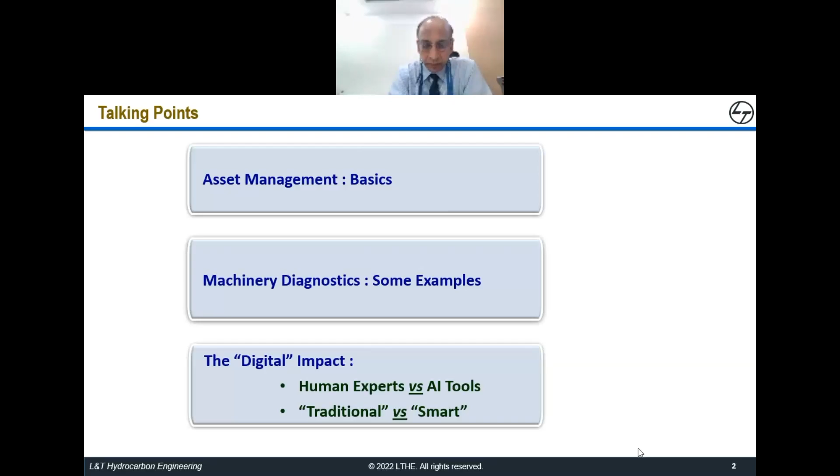Today's reality is, and I think all of us are exposed to this, myself included, we are constantly bombarded by a lot of jargon. We understand some of it, we do not understand most of it. But one thing we know for sure is that they're really impacting our lives, both professionally and socially, and they're going to impact and transform our lives in future.

One offshoot of this is, of course, the industrial sector, where we have seen the advent of IIoT and how it is transforming the way businesses are run. Machinery is designed, manufactured, engineered, and operated in the industry, and how this could help us meet many of the challenges we may face.

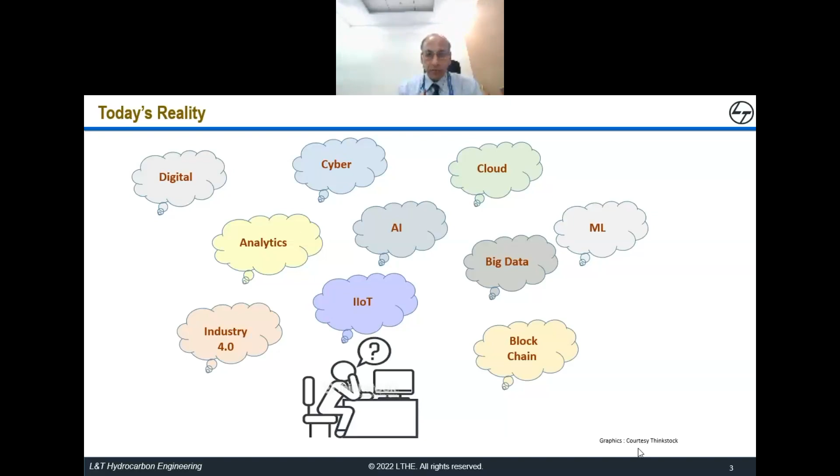Coming to the basics of asset management, let us try to understand why this is important for us. What do we do under asset management? Who are the people or the stakeholders here? And why is it so important for us?

Basically, the industry needs asset management primarily because of regulatory requirements - you have to comply with certain regulations and laws as you do business. You also have to uphold safety performance requirements, improve the performance of your aged plants as machinery becomes old, and avoid or defer your capex decisions - avoid putting a lot of money when the industry condition is uncertain and you lack clarity about the future. You can only take that decision once you know precisely what the health of your current set of assets is.

Also at the enterprise level, a very large conglomerate - suppose a company the size of L&T having multiple diverse businesses - has to take a balancing decision with respect to capex deployment and performance enhancement. What kind of information should they have - precise information about the health of the assets, how long they can operate, and with what efficiency they can operate. These are some considerations under asset management.

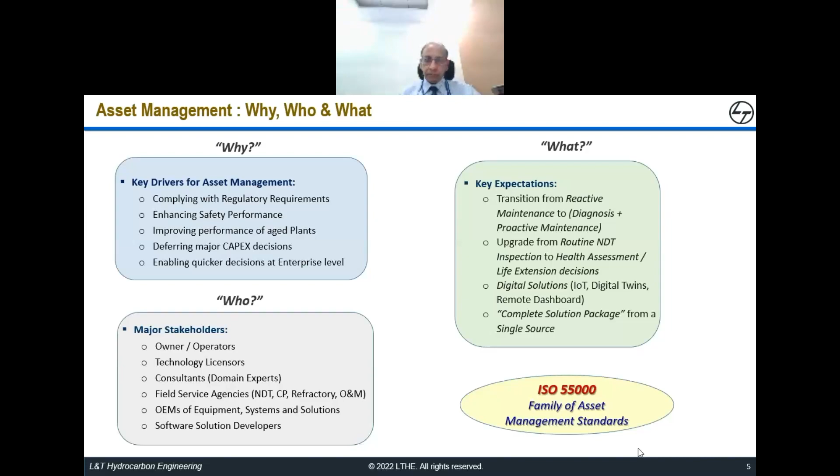What could be the asset management solutions when you are managing an industry that has, for example, a few hundred rotating machinery, a few thousand static equipment, kilometers of pipeline or piping, and a lot of other things built into it? What kind of solutions do you need to run this without any damage or catastrophic failures or accidents, and at the same time deliver the profitability that you are looking for?

You need to understand the integrity of these assets - are they in a fit position to run and deliver what they are supposed to deliver? Then the performance improvement piece - are they delivering at the optimum level, or is there still something left that you can extract? There are programs in the industry where you shut down the plant for a few days, weeks, or months and then refurbish the machinery, overhaul them, and put them back in as new conditions, so to say, so that the performance can be improved.

And you have a lot of programs like modification, upgrade, debottlenecking, where you again try to basically enhance the performance of these assets. And of course, you have the routine operation management and the maintenance management just to keep the machines running and to derive the output that they're supposed to give.

So as you can see, it is not one solution or two solutions. It is a complete set of solutions that you need to have at your disposal to run and basically operate your industry in the best possible way.

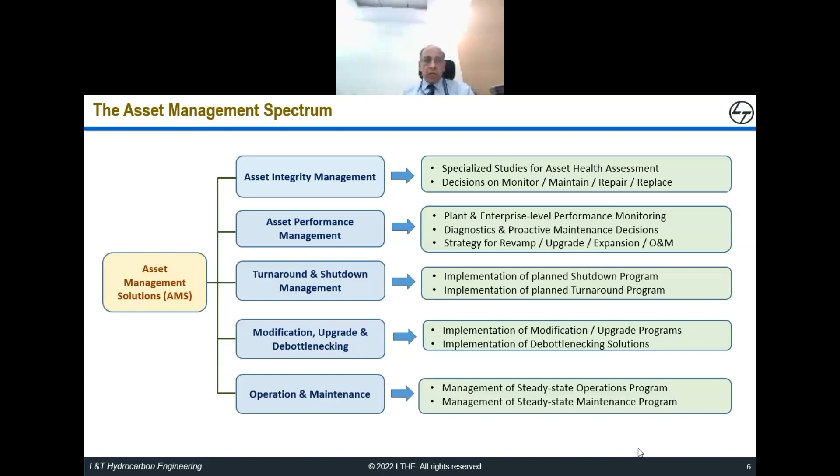So this is a traditional definition drawing from the concept presented by ISO 55000. There are three elements - basically the assets, the integrity of the assets, and how do you manage them. Assets are, of course, all the physical assets. Of course, in financial terms also, people call it asset - for example, you have asset management companies in insurance, banking, and other things.

But here we are talking about physical assets in the operating industry that include the plant and machinery, the offshore assets for oil and gas industry, the onshore pipeline and the pipings, the civil infrastructure - all the buildings, bridges, flyovers, highways that you see, most of which we also build through L&T. Transportation assets, the power sector assets, telecommunication assets - there is no end to this list. Everything that you see around, which operates and provides us the environment that we live in and the businesses that we are engaged in, these are all assets.

Now, coming to the integrity aspects - integrity means that the asset should perform safely and deliver the intended output or function in the prescribed conditions or environment over a specific period of time. This is very important to understand because the asset life cycle is not infinite. Any plant or machinery that you install in the industry today will have a definite life over which it can operate and deliver the output for which it is designed.

So there are three parameters basically. One is the safety compliance - that is very important. Then the intended function - it's not that you can do everything with a given asset; it will only deliver as per the way it has been designed and engineered. And the environment - suppose you are supposed to run something in sub-zero temperature, and you install the same machine in a desert condition, will it perform in the same way? And of course, as I mentioned, the definite life cycle, the specific period of time.

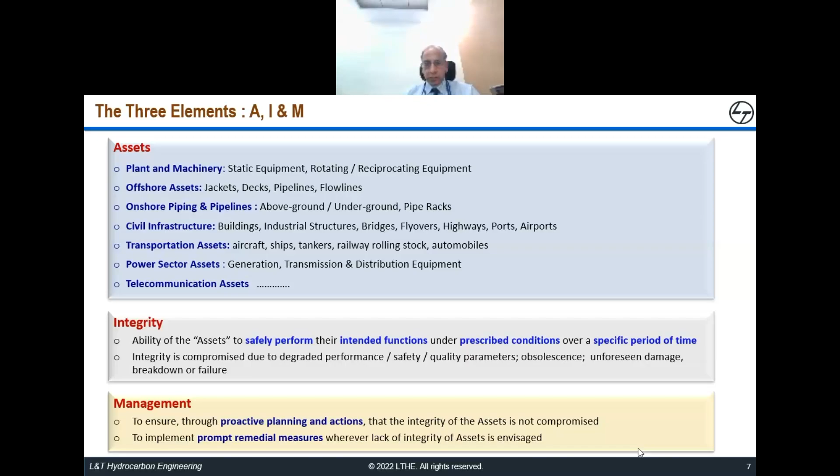So what are the tools and techniques we have at our disposal to achieve these kind of goals?

One is at the design and engineering phase of the plant, when you are conceptualizing how the plant should look, what kind of machines it should have, and what specifications those machines should have. Today we do simulation to a large extent in designing plants and machinery, from the process side, the mechanical side, and the thermal fluid side. You have a lot of design techniques and software tools available.

You have design verification. Earlier, and even today in some industries, people used pilot plants for trial runs of new designs, but mostly this is done through simulation now: scale up studies, prototype testing, pilot plant trials, experimental stress analysis, before you perfect the design of the machines.

Then, of course, you do the reliability assessment. Will it have 95% reliability? Will it have 99.9% reliability? You design that in the engineering phase so that you get the optimum output when it is put into practice.

One major degradation mechanism we face in industry, at least in my industry which is hydrocarbon, is the corrosion risk. We do a lot of simulations to understand that risk, the corrosion rates, and what kind of protection you should build into the design to avoid corrosion.

Now we have put the machines in the plant and it has entered the operating phase. What tools or techniques do we have to ensure integrity of assets? One is periodic monitoring: vibration measurement, noise measurement, debris analysis in the fluids particularly the lube oils, thermography which is thermal imaging of hot surfaces, and monitoring of process parameters.

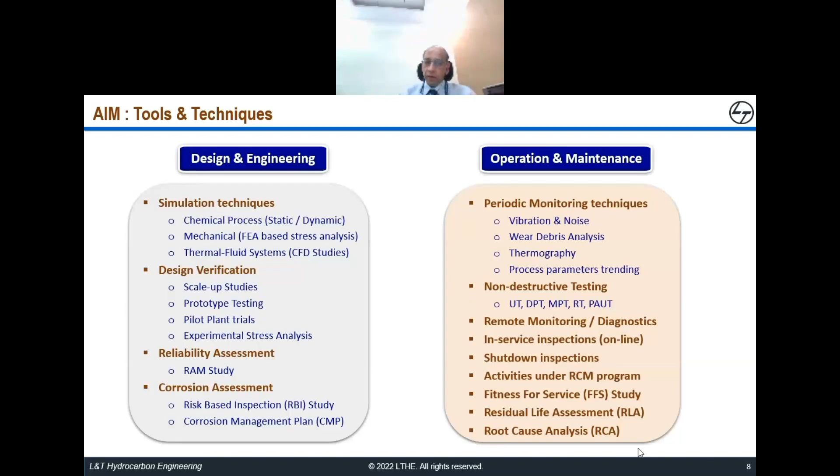We do some specialized techniques too. I won't have the opportunity to explain any of these today, but just to let you know: fitness for service or FFS, residual life of equipment which is RLA, and root cause analysis technique which is RCA. These are some of the techniques we frequently use in industry to understand the health of machinery and how we can extend its useful life.

Now, there is a concept of asset life cycle. Traditionally, when people talk about asset management, they only talk about the operating phase of the plant. For example, a plant installed today will probably run for 20 or 25 years, and you focus only on that operating and maintaining phase. But the reality is that if you really want to do asset management in a holistic manner, you have to start from the design and conceptualization of the plant itself.

So the key to successful asset management is this cradle to grave approach, where you start from the conceptualization of a plant and it ends with the decommissioning of the plant. Through the entire life cycle, you adopt the tools and techniques just discussed to do the asset management in the best possible way.

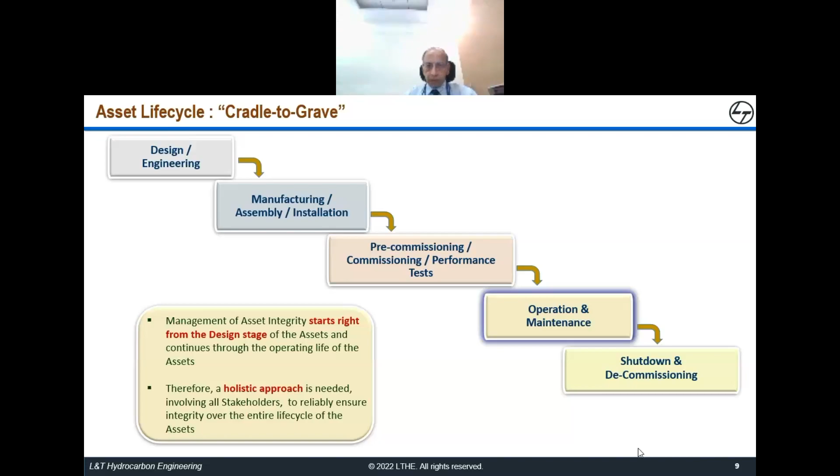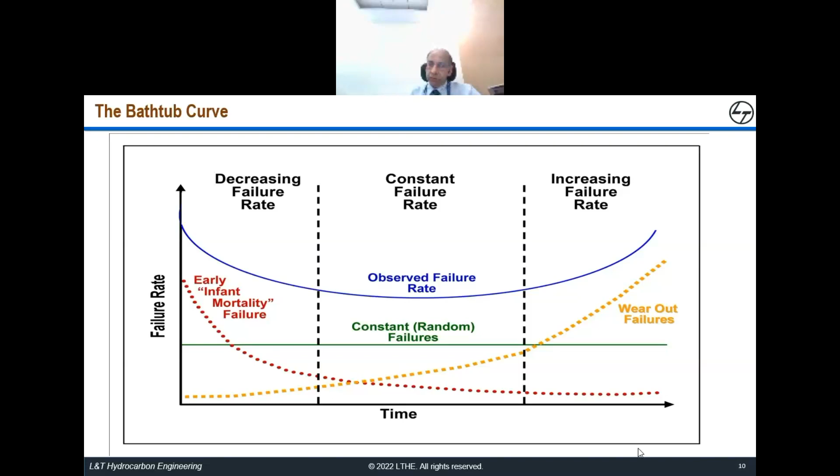We still do that for systems which are non-critical and where you have redundancies built in, with other alternatives that can start operating in place of the failed equipment.

Then comes time scheduled maintenance, which is the most prevalent even today, though it is not the most efficient way of doing maintenance. But we still do it for very critical assets in the process industries, turbo machinery, power plant equipment, oil and gas production equipment, where you can't afford to have failures.

So every say 2 years or 3 years, you stop your plant, do a complete overhauling, and rectify the faults that are developing, then put the plant back in operation. But this is not really cost effective, as you do a lot of unnecessary maintenance where it would not be called for.

That is why people gradually switched to condition based maintenance, where you do the maintenance that is actually called for by the prevalent condition of the asset. You try to do some health assessment on the asset, in terms of vibration, stress analysis, then microstructural analysis for the material, and try to see what condition it is in, and what kind of maintenance it may require today or a couple of years down the line.

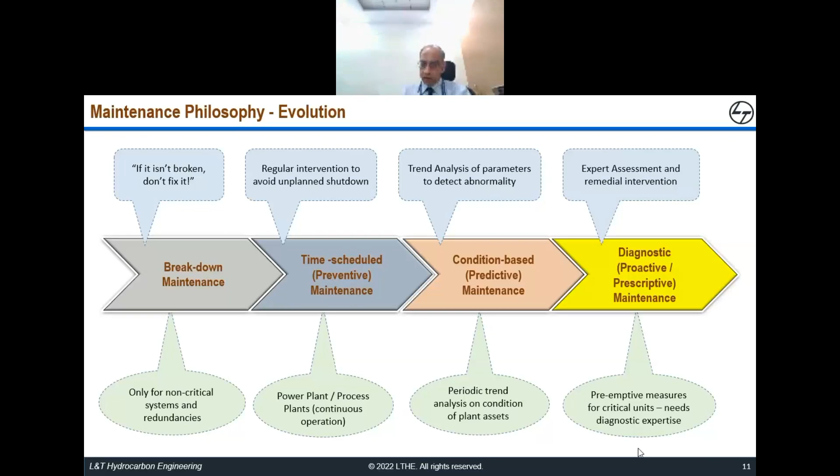With this knowledge of basic asset management philosophy and approaches, let us now see how we do this in real life industry. I'll illustrate using common machine components that we are aware of, for example gears and bearings and stuff like that. Though these are part of the whole plant, they are not the plant by themselves, but their failure is very critical for the running of the actual pump, turbine, or compressor.

Now, I'll start with gears. Gears are very popular machine components. Right from our engineering days, we have learned how to design gears, how to manufacture them, what kind of problems you see in gears, and how to troubleshoot gears.

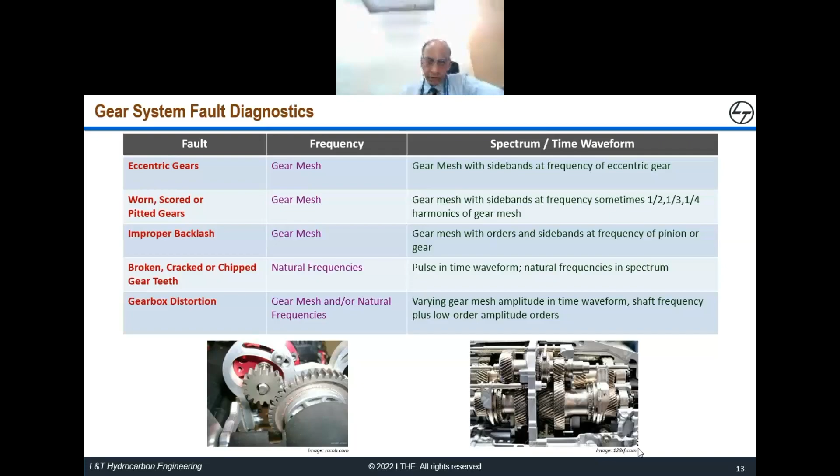Now, there is some mathematical basis for this. As you know, in gear and pinion, we have a very periodic kind of engagement through the machine. In terms of the gear tooth, pinion tooth, and running speed, you can have various combinations of probable frequencies that you may see in the spectrum.

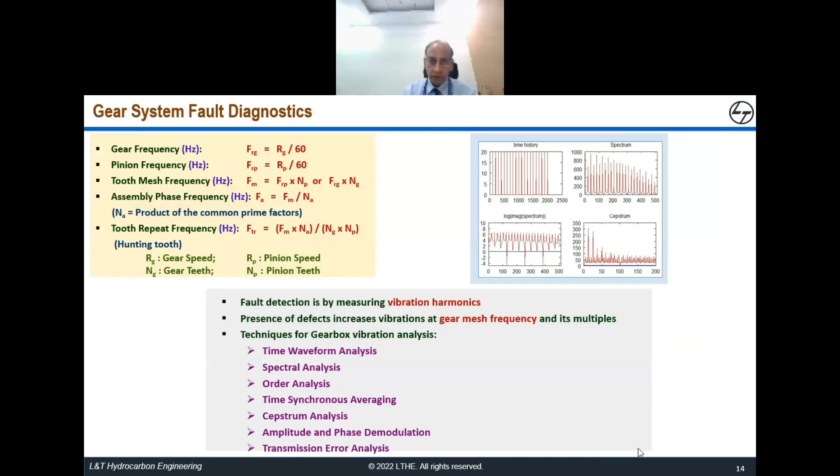The frequency spectrum analysis techniques - some of these I have listed here - are what we typically use in the vibration analyzer when analyzing gearboxes. They throw up the fault signals, and through that you diagnose the fault, and once you know the fault, you also recommend the corrective measure for the gearbox.

These are some of the actual plots, as you see - some of the faults are mentioned here. I will not go line by line, just to tell you that the dominant frequency in a gearbox spectrum will be the gear mesh frequencies, and depending on the severity of the problem, you will see multiple sidebands, very large amplitude lines vertically, and sometimes even natural frequencies of the gears and pinions if they have cracks. These are some of the things the expert should be able to extract from this - it should not be too difficult for him.

Now, when we go to the second part of my talk and discuss digital solutions, I'll try to explain how this kind of diagnosis, done by the human expert based on experience, would be done by an AI tool, for example. Is it possible at all? Can the AI tool do a better job, or can it not do this kind of diagnosis at all? That would be interesting to discuss.

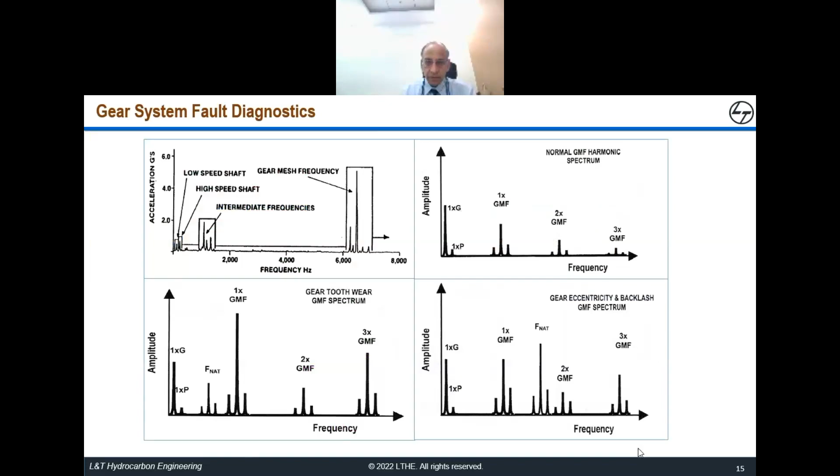Okay, some similar kind of spectrum - here you see some of the other classes of faults. You see a lot of subharmonic lines on the left hand side, which shows a lot of incipient damage, not very prominent yet in the machine, but which may cause trouble in the future. These are some of the things I can read out of this, but probably if you really get down into the mathematics and extract the frequency and try to correlate, you will also arrive at the same kind of diagnosis.

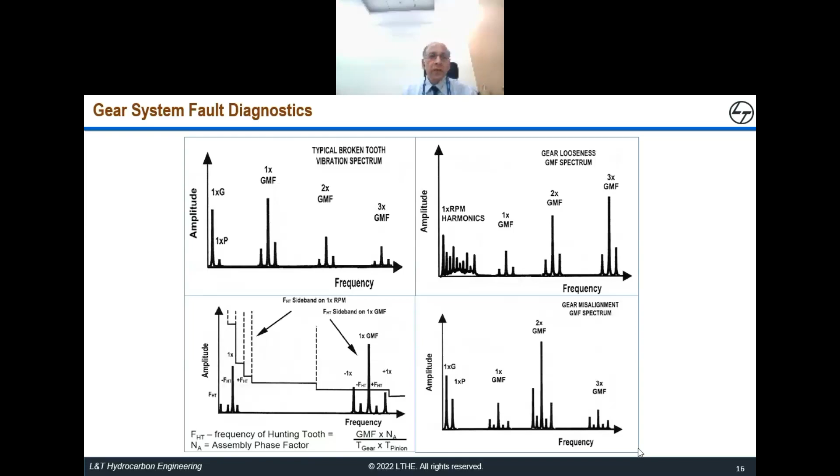Coming to the rolling element bearings - by the way, dynamics-wise they are very similar to gear mesh. Here also you have a set of contacts which are periodically engaging and disengaging, and you have multiple components in rolling element bearings. As you know, you have the rolling elements, the inner race, the outer race, the cage, and all sorts of combinations of faults can occur. Rolling element bearings are very sensitive devices - if you mishandle them, half their operating life will go. And of course, on top of that, you have a lot of materials-related damage that are possible.

For example, spalling, wear, fretting, corrosion, improper installation, improper mounting, inadequate lubrication, risk of electrical discharge, particularly in rolling element bearings installed on motors and generators. You can have load overruns, overspeeding, excessive point load applied on a bearing. There are many things which are possible, and we do have some understanding today.

If you see the body of literature that deals with the fault diagnosis of rolling element bearings, we are comfortably placed in terms of having the right kind of tools at our disposal, so we should be in a position to, with some sort of certainty, predict what is going wrong in a bearing installation.

And then again, just like in the case of gear analysis, we have frequency analysis tools at our disposal, where you analyze the raw signal coming from the bearing installation, extract the frequencies, and then try to diagnose the faults that would be present there.

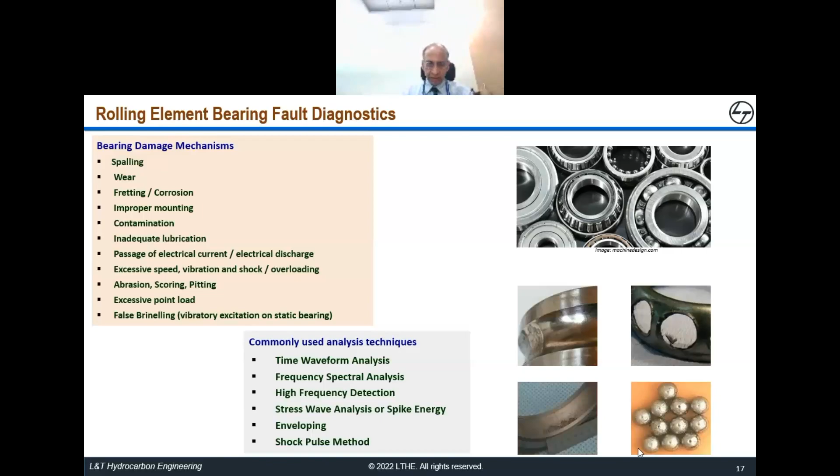And again, like gears, you have a set of characteristic frequencies depending on the bearing design and its operating speed. Whether the fault is occurring on the inner race, the outer race, the ball or roller, or in the cage, you get a very typical characteristic frequency in the spectrum. If you know the bearing design data, you know which frequencies to expect, and if those frequencies are present in the spectrum, you know what the problem is.

You see some of the time domain signatures on the right as the bearing runs, showing how the defect area gets excited within the bearing. You get these spikes in the time domain signal, which you can convert into a frequency spectrum, where you will see single lines at those locations of the frequency.

And once you match these with the frequencies shown by the ball pass frequency, or the inner race or outer race frequencies, you know that is the damage. The crack is there in the inner race, the damage is there in the roller, or the deformation is there in the outer race, and things like that.

So once you know beforehand how severe the problem is, you may recommend the operator to run it for some more time until the next plant shutdown, or if it is too serious or severe, you recommend replacement of the bearing at the same instant.

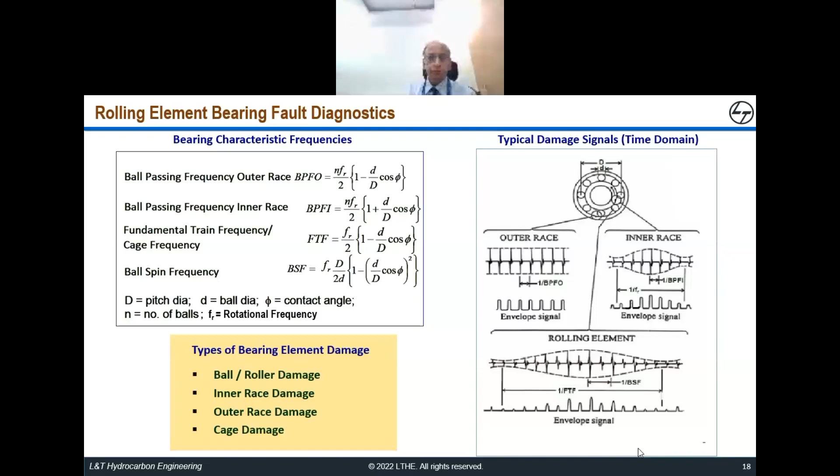These are just some examples of how you read the spectrum, how we as experts would be reading the spectrum to diagnose where the damage is.

So that is the kind of facility we have today.

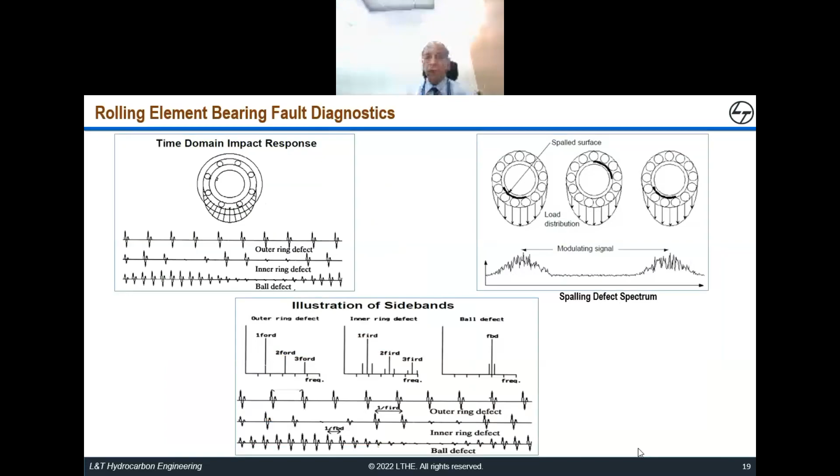Coming to journal bearings or fluid film bearings, there also we have a set of approaches to diagnose what is going on. Now it is comparatively difficult to handle compared to gears and rolling element bearings. In journal bearings, as you know, it is very difficult to open the bearing, and you cannot really replace it. You do a lot of online monitoring through the proximity probe system to pick up the displacement signal from these bearings and try to analyze as much as you can through a set of plots or curves which are characteristic of different failures. I'll explain some of these.

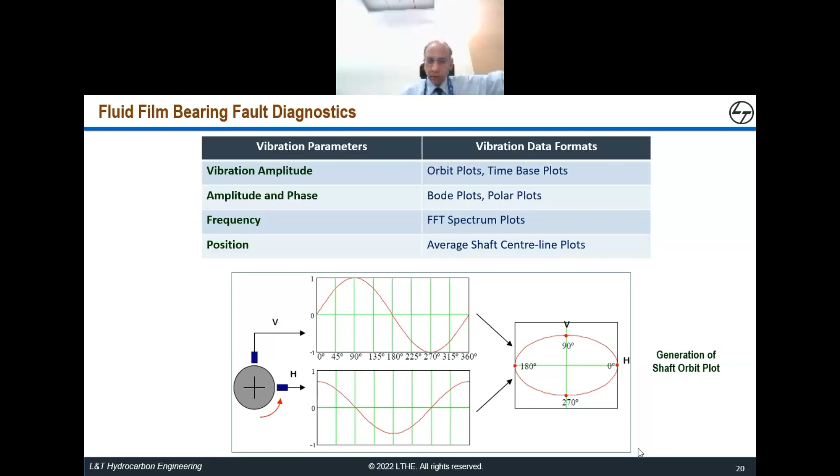Depending on the shape and size of the orbit, you can actually extract a wealth of information about the bearing damage. Similar to gears and bearings, you have a very nice correlation between the vibration pattern and the different faults in the journal bearing. If you can spot these frequencies and monitor this pattern over time, you can predict how the deterioration is happening in the bearing.

There are various kinds of damages or problems possible in a journal bearing. Some of these are listed here, along with their characteristic frequencies. One thing that is very dangerous in a journal bearing is the subsynchronous vibration signature, which shows instability in the bearing that normally builds up and wrecks your machine. So you should not normally expect a half frequency or subsynchronous frequency spectrum in the vibration signature from a journal bearing.

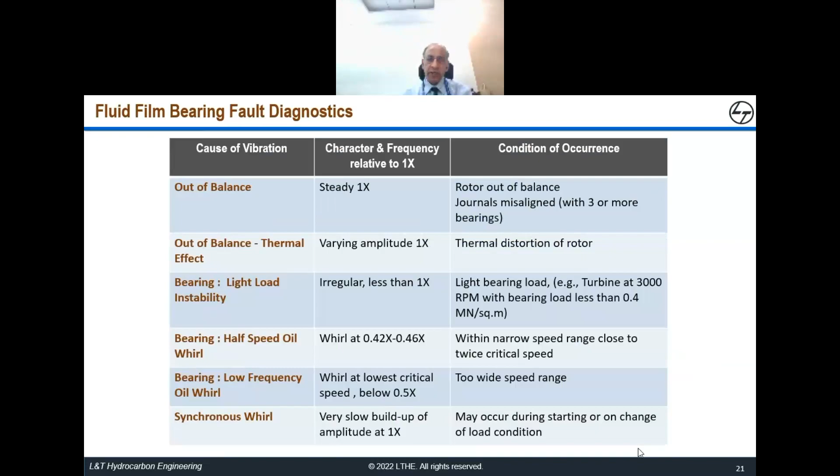Basically, the orbit plot study tells you all this information, and based on that you can take corrective measures, or instruct the machine operator to run the machine in a particular way so that you don't run into further problems.

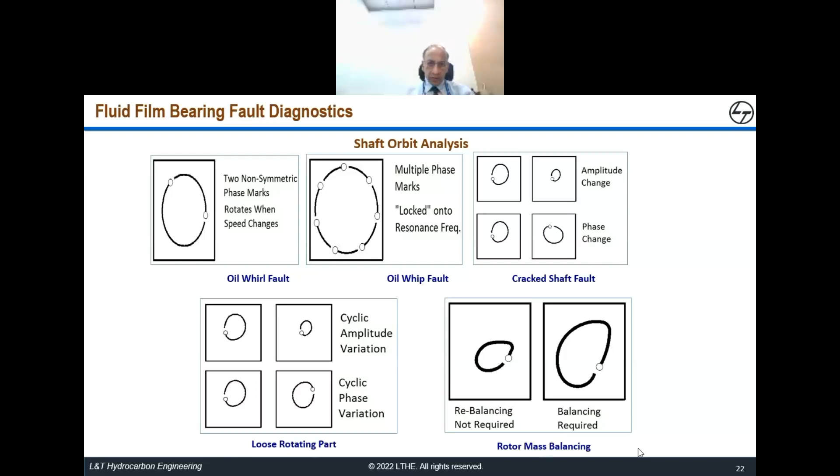I'll also briefly outline another technique that is very popular in the industry today, that is thermography, where you take a thermal image of the equipment or component you are studying, map the temperature distribution over the surface or component, and try to diagnose where the hot spots are.

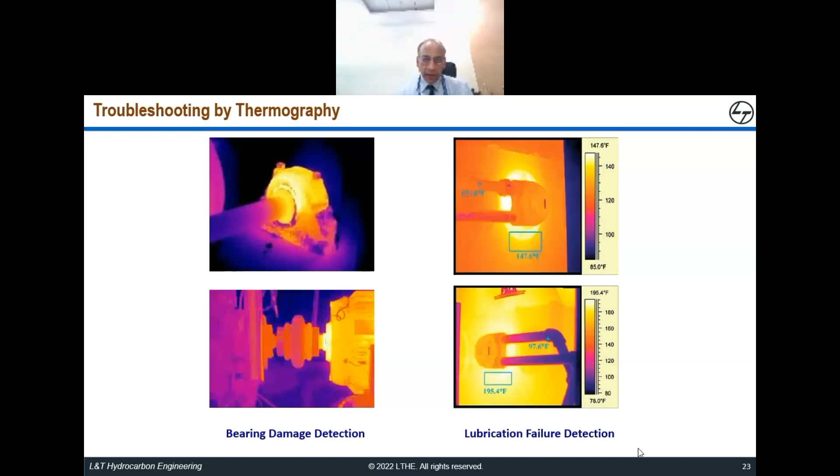And there is no further difference I could find, but we successfully diagnosed the problem as the wire wool failure. We did the material testing of the failed bearing and came up with the diagnosis which Neal had suggested in his handbook. That is how the problem was solved, and it was found to be a materials problem, high chromium content in the bearing liner.

And the OEM was obliged to supply the replacement bearing free of cost. Now, this is the kind of once in a lifetime problem where it is very difficult to know what happened. Luckily, in this case, we could establish the cause and get the compensation from the supplier.

But we may not be so lucky every time, and some of these actually go undiagnosed, and we never knew what actually had failed and how it failed. That is a nightmare for a diagnostician, but it can happen in the industry sometimes. It would be interesting to know how a digital tool or an AI tool would handle this kind of situation.

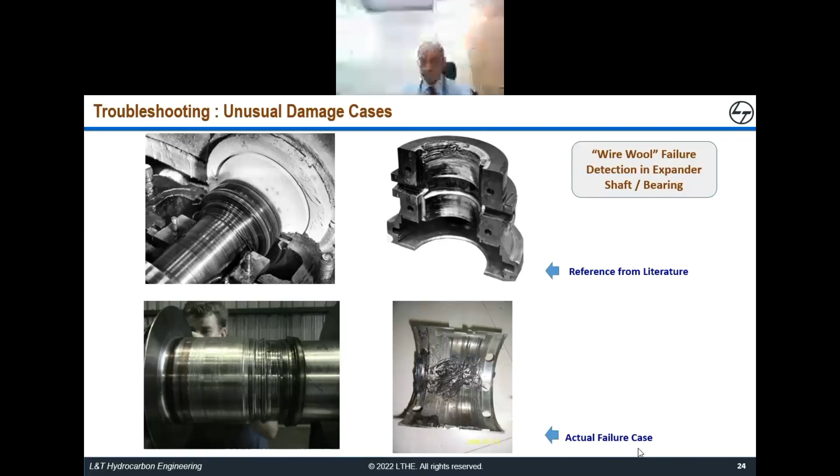So now I come to the last part of my talk, where we will try to see the human expertise at play vis-a-vis what the digital counterpart would do in the kind of situations I just explained, with respect to asset management and asset fault diagnosis in real life. So basically two points I will touch upon.

One is how the human expert is placed with respect to the capability of AI tools, and can we have a combination, or are they really mutually exclusive? Can we still marry traditional with the smart or emerging approach to asset management, or are they totally different situations? It's like water and oil, you can't mix. So let us see how it goes.

What does a human expert possess? The human expert is supposed to have rich domain knowledge, typically 30, 40 years of experience in a given line of business or practice. He will be having a lot of experiential learning, which he has learned on the job, which may not be taught in a classroom. And human experts are, of course, scarce.

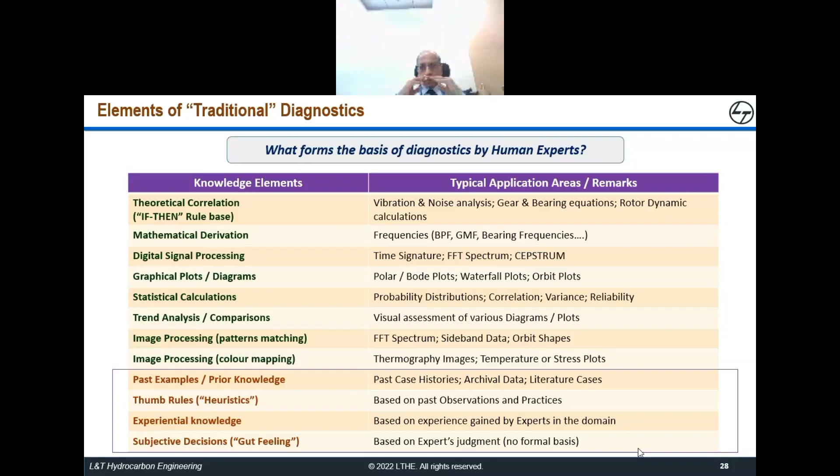Now come to the way the AI tool would be functioning in a similar kind of situation. What would be the knowledge elements feeding the computer tool or the AI tool or the digital solution that you are employing, and how it will be processed by the tool. In the first part, the theoretical correlations, the mathematical derivations, signal processing output, graphical plots, all these can be codified and fed to the tool. These are structured data and information you can easily correlate, and the computer program can be trained to process it in a certain way and give you the output.

But again, as in the last case, if you look at the 3-4 items at the end which I have highlighted here: past example, prior knowledge, rules of thumb, heuristics, gut feeling - how would you teach the AI tool about all this? This is so very typical of human. You cannot really codify it in a structured manner, develop a computer program, train that program 100 times, 200 times on a case, and then deploy it in the industry to solve the problems. This is where the disconnect comes. This is where probably the AI tool may not really be in a position to replace a human expert.

This is what we feel today, because we see in the industry the advent of digital solutions in a big way. We are into the IIoT regime for almost a decade now, and a lot of it has come into the industry and is being used routinely. And of course, we humans are still there manning the industry, running the industry, and doing troubleshooting, and we know how we solve problems. This is one area where probably today's technology is not supporting us in a way the human expert can support the problem.

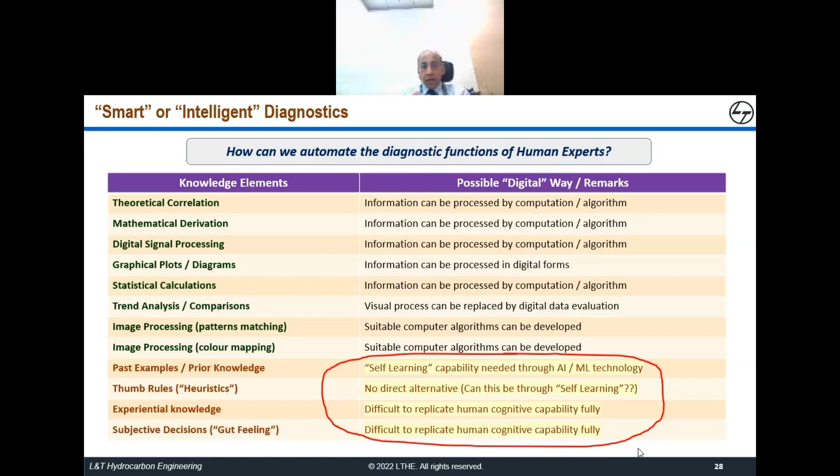If you consider this as a digital platform, you will have a lot of sensors mounted on the machine which are collecting the data day in, day out, maybe in real time. You feed the data, you pre-process and analyze it through some digital platform. It could be your cloud resources for storage of data, it could be a data historian, it could be a digital twin, a digital model of the plant that is running. You could have some specialized solutions based on artificial intelligence and machine learning, and you could have a lot of analytics built into it depending on the volume of data that you generate from the plants.

So when all this is done, the domain specialist would look at that and give some recommendations based on the processing that has been done in the previous step. And what could be the output? It could be expert advice, it could be remote diagnosis output, it could be some remedial action suggested to the plant operator, it could be certain kind of recommendations given in the form of an apex dashboard to the top management in the industry for them to take the decision for the future - whether to retire that piece of equipment, whether to replace it, whether to go for new capex, or set up a new plant altogether and decommission the existing old plant.

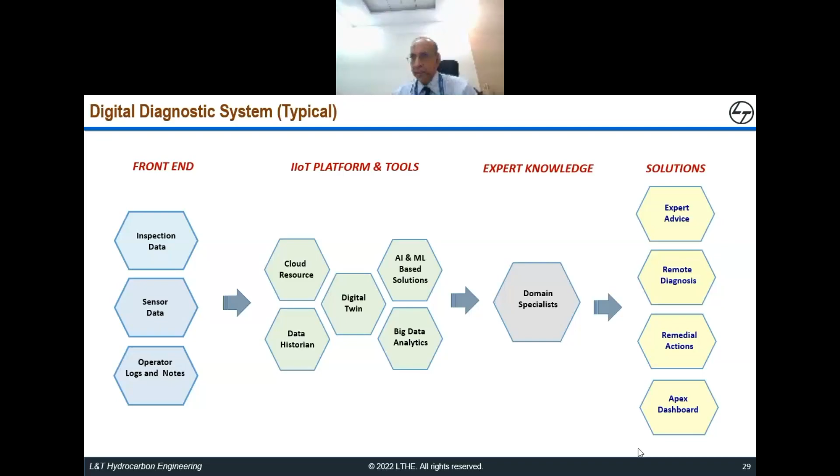You have instrumented all your pumps, compressors, and turbines with these sensors, and connected all of them to a data collection unit. It also takes input from various kinds of studies you may be doing offline, such as reliability studies, RBI studies, HAZOP studies, failure analysis studies, and these are all fed into the database you are developing along with the sensor readings.

Then you have a data historian, which maintains the archive of historical data generated from the plant over weeks, months, and years. Once you do the analytics over this entire database, you come to the output.

It could be a form of digital log, KPI-based monitoring, alerts and notifications, reports or MIS documents, or role-based dashboards for different layers of management — the control room operator, the plant manager, or maybe the chairman or president of the company. They would like to look at different kinds of output from the plant to take their decisions in day-to-day life.

You could get predictive and prescriptive solutions coming out of the data analytics. You could get plant performance analytics — how the plant is doing today compared to last year, how it is expected to do next year, and things like that. So this is all happening at the plant level.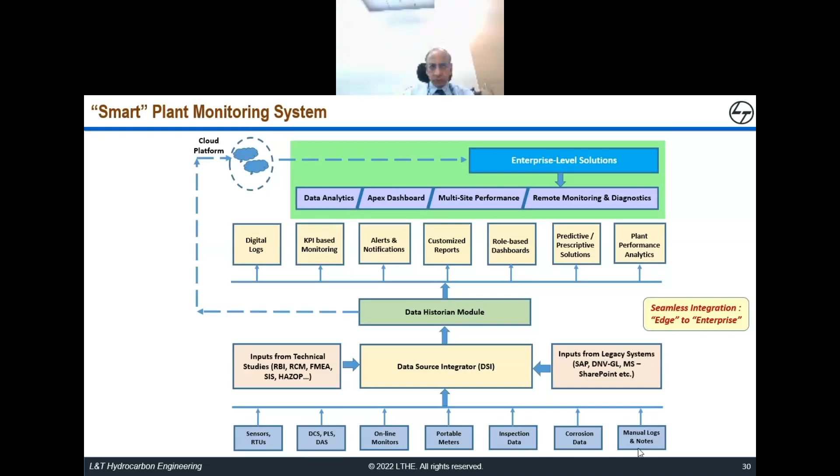So if you really want to implement this kind of digital asset management solution in your system, your facility, or your plant, what would be the roadmap? How would you go about doing this?

First of all, we have to be really realistic and objective in what we want to do. You can't have the moon just because you want it. These are real assets you are dealing with, this is real money you are dealing with, and this is a real-time industrial environment that you are dealing with.

So you have to be very practical here. You identify your critical assets. Maybe a small pump with a standby may not be as critical as a turbine having no standby. So you would rather focus on the turbine rather than a small pump.

Then you have to select the digital solutions and the platform very carefully. There are a lot of suggestions, a lot of alternatives available in the industry. Not all of them may suit your particular requirement and your kind of industry. So you have to be very careful in choosing the platform.

And we commonly make the mistake of generating thousands and millions of pieces of data, and 80% of that we never use. It's a big reality in today's industry. We spend a lot of money gathering data that is never used by anybody. How to optimize the data, how to rationalize and basically streamline the data coming from the field is a big challenge the industry is facing today.

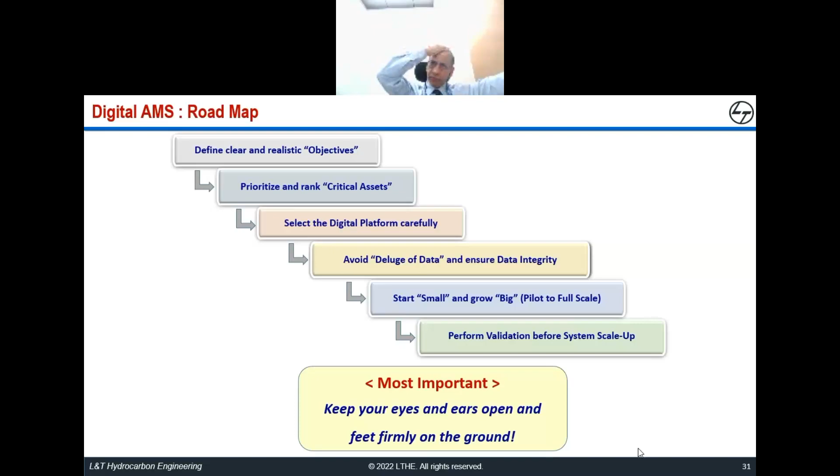And you have to start small and grow big. You cannot go to the ultimate, the full model that I showed. It is very difficult for any industry to adapt a full digital model, start to finish, edge to enterprise. You basically start in small steps, build up your capabilities and infrastructure, and gradually go to the top level. That is how it should be. That manages your cash flow and your capex deployment well, that trains your people in a proper way, that brings in the right mixture of human interface with the digital interface so that you do not cause any upsets in your operating industry, right?

And the performance validation is a very critical step, because we are dealing with digital tools and solutions. You are not always sure that 100% of the time they are giving you the correct output, because it all depends on the kind of data, the authentic data or information that you are feeding to the system. That equally applies to human experts, but it is more so in the digital case, because it is in a black box. You do not have the freedom or liberty of discussing with the AI tool. It will give you information based on whatever information you have fed to it.

In the case of humans, you can actually have a session with the expert, try to understand his philosophy, his line of thinking and logic or reasoning, and you can counteract that. But you can never do that with an AI tool. So that's a problem. That is why validation is so much needed in the case of a digital tool.

The most important thing, as I mentioned in the beginning, is basically to be realistic. Keep your eyes and ears open and feet firmly on the ground. Don't get blown away by the digital revolution. There are very real issues to be considered before you can actually select and deploy a digital tool in the area of asset management, because you are dealing with billions of dollars worth of assets in the industry. You cannot just take any irrational decision.